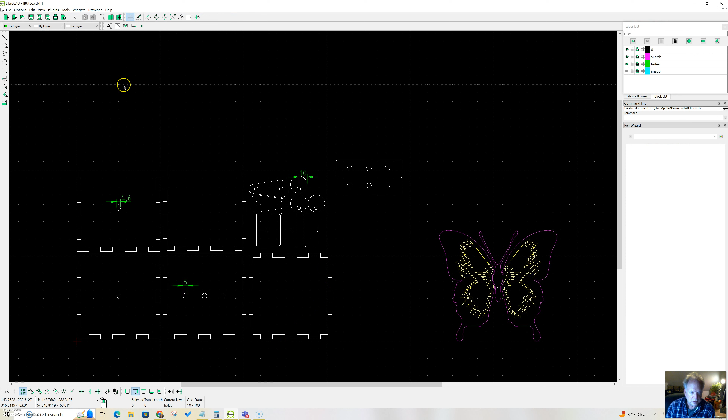So really all I want is some wheels. These are just simple circles with an off-center bore.

Now I wanted to play it safe with this one. I don't have a lot of upward motion, just a little bit, moving the wings up and down. So I decided to make these particular wheels only 20 millimeters across, or 10 millimeters in radius.

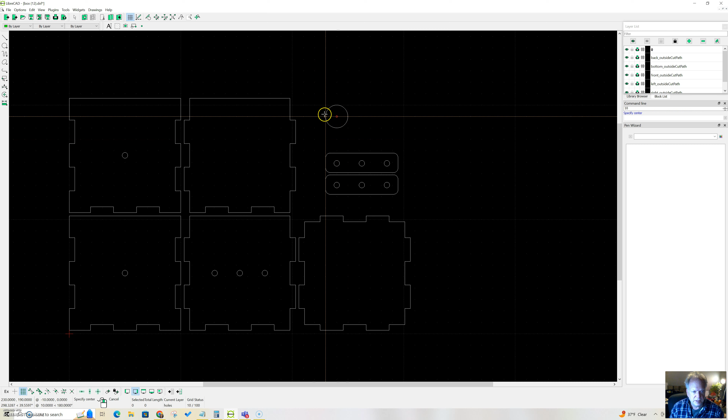Okay, so I'm going to click on my center circle, and I've got my snaps on just the grid. So if I click it here and type in 10, I end up with a 20 millimeter diameter circle. Okay, I'm going to zoom in on that.

And I actually just want to make it—I've forgotten, so I'm going to measure it again. I've got my rod right here and my caliper. In this case, I wanted the rod to be able to move through it relatively easily.

In this case, I want my rod to stick. So I want it to be barely big enough that when I shove the rod into the hole, it's actually going to stick, and I'm just going to need a little bit of glue to hold it there permanently.

So with my caliper, I'm going to measure this. I don't remember what it was. I'm at, this is about 4.9.

So what does that mean? Well, that means if we have my calculator here, 4.9 divided by 2 - I should have done this in my head - 2.45 is going to be the radius that I want this cut.

Okay, so please make sure you measure your rod. Don't trust mine. This was a different package than some of the ones we have at school. And like I said, we're probably going to be using quarter inch rods. We'll have them available for you, so you might even be choosing an entirely different rod. But mine has a radius of 2.45.

So I'm going to go in here again with my circle center point. And I'm going to put it, maybe about here. And then I'm going to go 2.45, enter. And there you go.

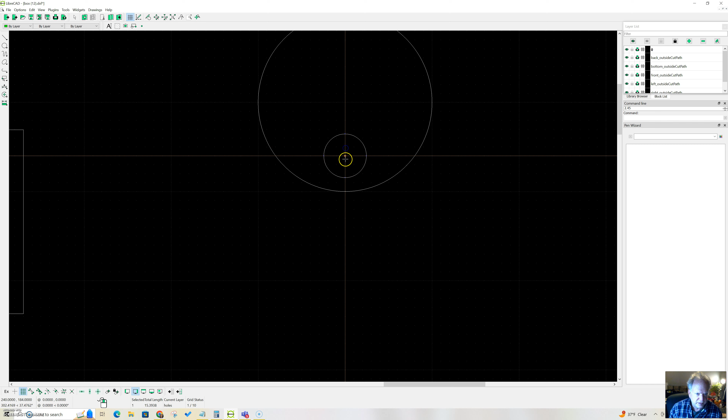I've got my off center. In fact, I think that might have been a little bit too off center. I'm actually going to move that to there. There we go, something like that. I think that looks better.

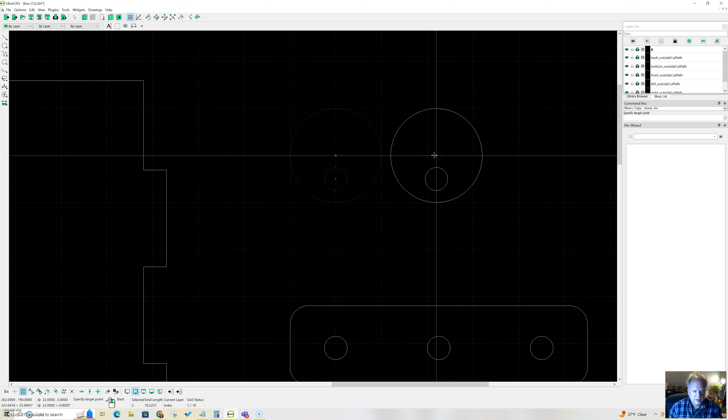And ultimately, I have 3 of these. So I'm going to go ahead and do a copy - move copy. I'm going to choose a center point and drag it over here. I want a total of 3 of these, so I'm going to make 2 more copies. Make multiple, 2 - oh, not 32, 2. Okay, boom. And now I have my 3 various wheels basically ready to go.

So the other thing we need to make is the crank. Now, to do the crank, generally speaking, they're crank-like, for lack of better words. You can make it straight, you can make it anything you want it to be. You could literally just take and make a wheel. The simplest crank would be something like this.

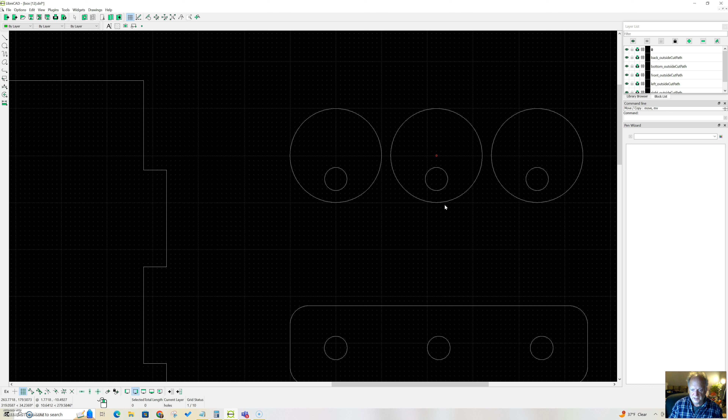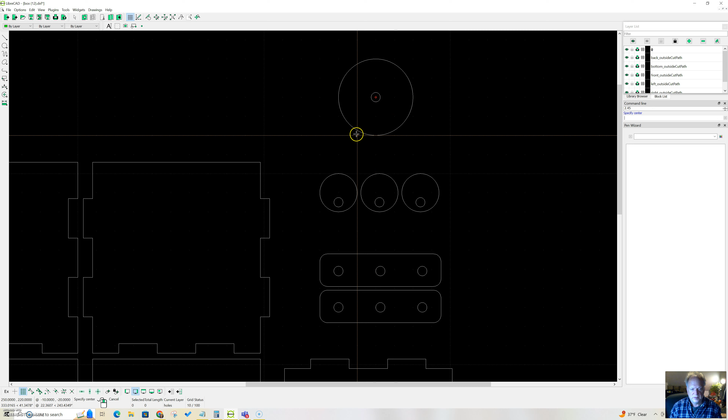I could take a wheel and do a center point wheel, and say, I think my crank should be about this big. And then I could come in here and put a 2.45 - that's going to be my axle. And then someplace over here I can put my handle. Boom, and I've got a crank.

That would be a continuous wheel where this is going to be the axle that drives through the apparatus. And this, of course, would be where your fingers are, so it's holding on as you turn the wheel. That's perfectly great, that's a wonderful crank. But I wanted to make something a little bit different, something like this. To do that, let me pause briefly and I'll be right back with you.

Okay, so the way I'm going to make a crank like this, that sort of classic off-center crank mechanism - I'm going to start, there's lots of ways to do this. I could take 2 arcs, for example, and connect them. I could use a spline. There's a lot of ways I could do it, but I'm going to go ahead and do it basically using my circle tool again.

So I'm going to start a circle, and let me get off these grids like this, and let me just snap to grid. And I think I'm going to start with a circle that's pretty much the same size as my drive wheels, which is about 20 millimeters.

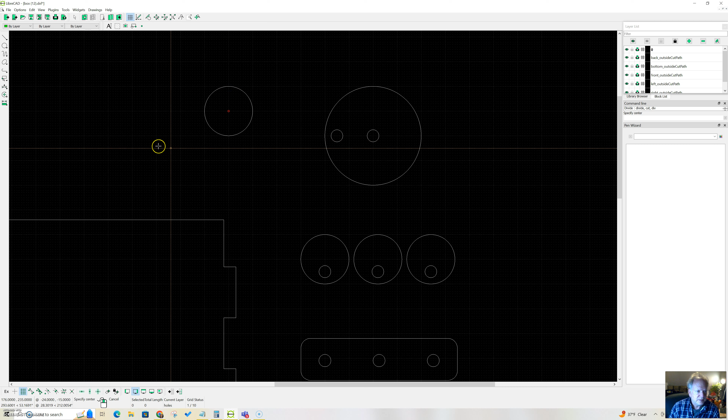There we go. And then my crank is probably going to be, I don't know, let's make it kind of long. Keep in mind, these sides are pretty big, so as long as it doesn't go over the edge of one of these sides, I think we're good. So I'm going to put it about here.

And I'm going to zoom up a little bit. And we just need it to be bigger than this hole, so I'll make it about that big.

Okay, and now what I want to do is connect these 2 circles. So to do that, I'm going to turn off my snap to grid, turn on my snap on entity, and then I simply want to make a 2-point line.

And I want to get on the entity - see how it's clicking to it or sticking to it? I want to get on it at the top, so I'm going to go up here, and I'm simply going to connect it to the top of this circle. And then I'm going to hit escape.

And I'm going to do the same thing here, and connect it to the top of this circle. Okay, and now you can see I've got those connected.

So now what I want to do is simply delete this and this. So to do that, I have to divide my circles. So I go here, I choose the divide tool.

Then what I want to do is select what it is I want to divide. So I want to cut this circle, so I choose the circle.

It'll turn gray. And in this case, I want to go down here to my snaps and turn on my intersection, because I want it to snap to the intersection of my line and my circle. So I'm going to do it right there.

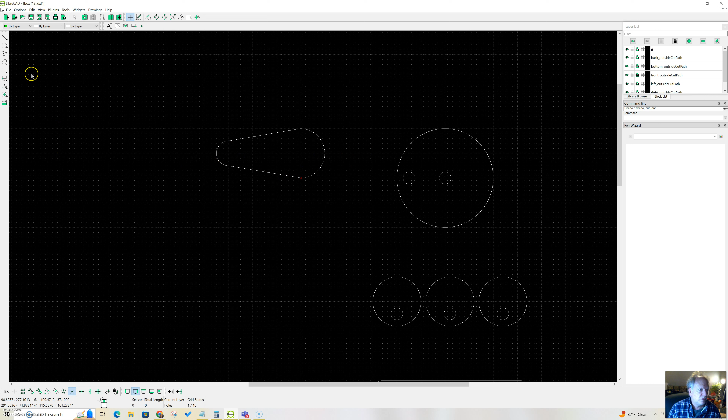Now all I have to do is put my two holes in there. Once again, I'm going to go to my circle tool, turn off my intersection snaps, turn on this snap - snap to grid - and we need to put in our 2.45 diameter hole there, and a 2.45 diameter hole there. And now you can see I've made a crank.

I actually wanted my crank to be kind of thick, so you can see here that that's actually two pieces of wood that are glued together.

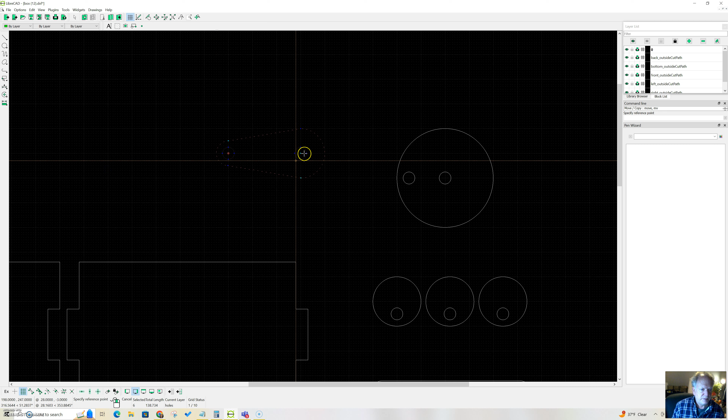So I'm going to do that. I'm going to select this, and I am going to move copy. I'm going to choose this point here, drag it up here, and in this case I want to keep the original and say OK.

And now I've got two of these that I can arrange and cut out. So this is 11 minutes, so we are pretty close to done with all the pieces of the box.

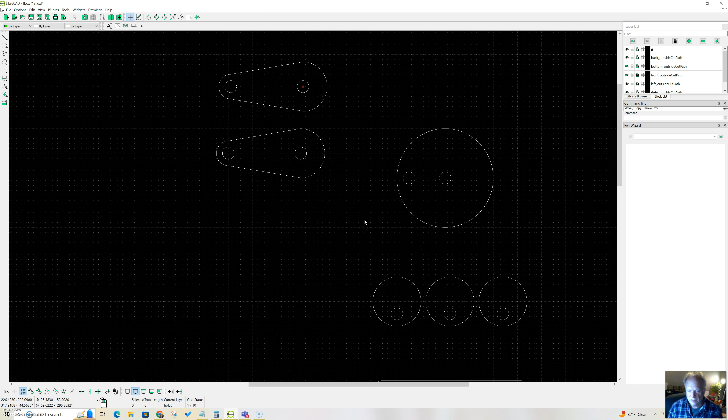The last thing that we need to make are these little guides that hold, that ride on top of the wheels. So I think I'm going to make a short video on that, and I will once again see you real soon.